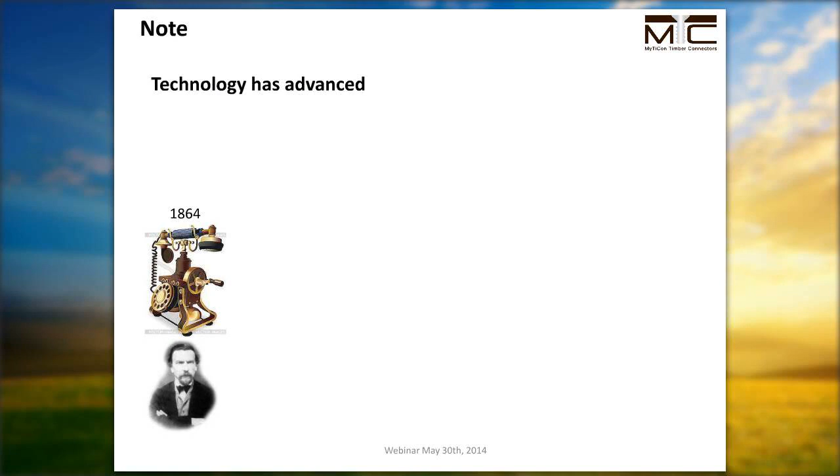First of all, we'd like to note that technology has advanced, not only in the phone industry, just like we see here in the first picture. The first phones were not easy to use - we had to generate electricity first, we had the dial pad, and it was not very convenient. Then later, when I was a little kid, I still remember we had these phones with the dial pad and the big handle that you had to pick up and dial. Today we all use smartphones with big displays, and we can actually view PDF files and structural drawings right on our phones. Technology has advanced not only in phone technology or cell phones and landlines, but also in timber connections.

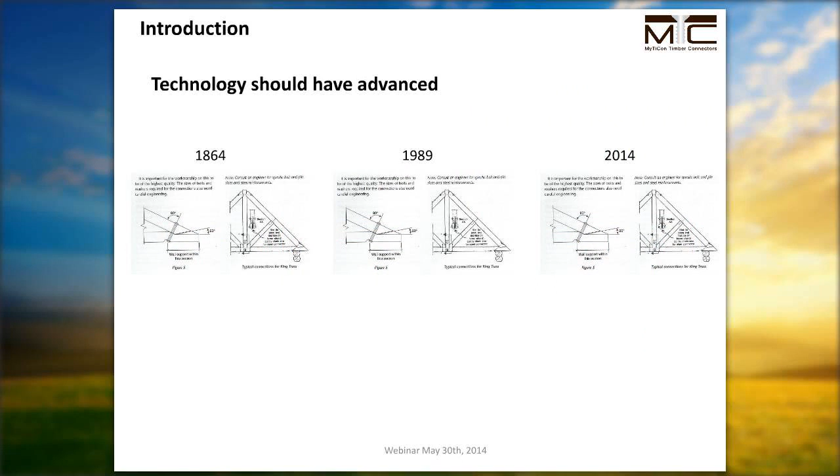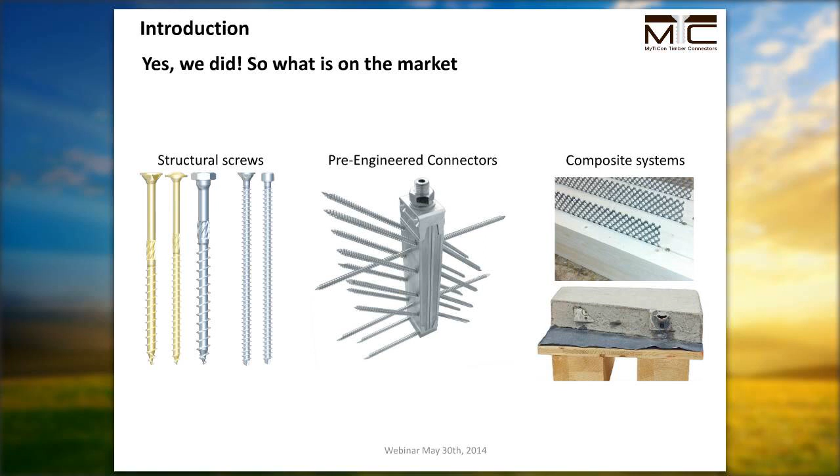Sometimes if we look at some of the structures and designs, we feel like there is no advancement, but there is certainly advancement in timber connection technologies. So yes, we did advance - in particular, we advanced in screw and glue technologies that we currently have on the market.

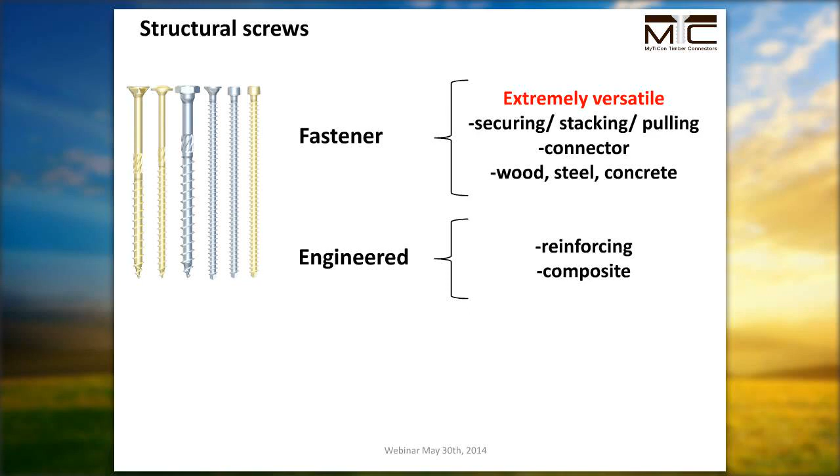In regards to structural wood screws, we can basically distinguish them into fasteners, where they are extremely versatile for securing, stacking timber pieces, pulling timber pieces together, and connecting wood to wood, steel to wood, and wood to concrete. If we look into more engineered applications, we can use structural wood screws as reinforcement, which we'll address later, and composite, which we'll also talk about later. So we can use these fasteners to reinforce our timber elements and create composite actions between different materials.

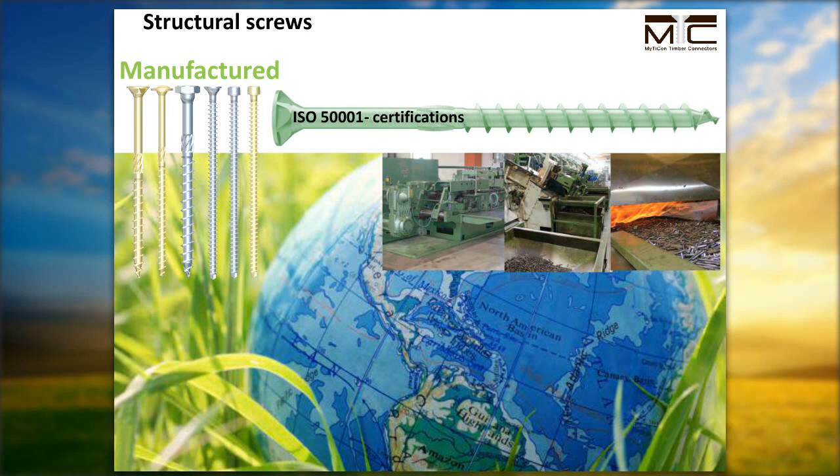From a sustainability point of view and LEED certification, it became very important that the manufacturing process of structural wood screws is ISO 50001 certified. This means most manufacturers have the ISO certification, meaning they use sustainable energy resources and have energy management systems in place to manage their energy use and be as efficient and as green as possible.

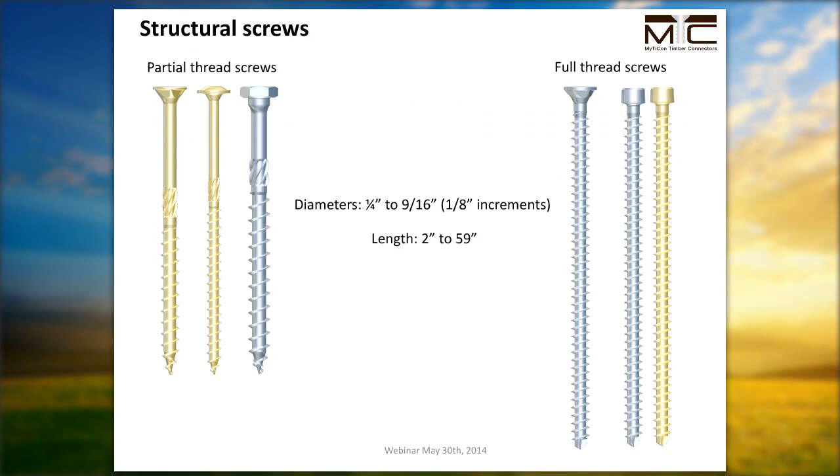For structural wood screws, we basically have two major groups. On the left-hand side we see the partially threaded screws, and on the right-hand side, the more engineered screws, the fully threaded screws. Diameters for these fasteners range from 1/4 inch to 9/16 inch and come in lengths from 2 inches all the way up to 59 inches.

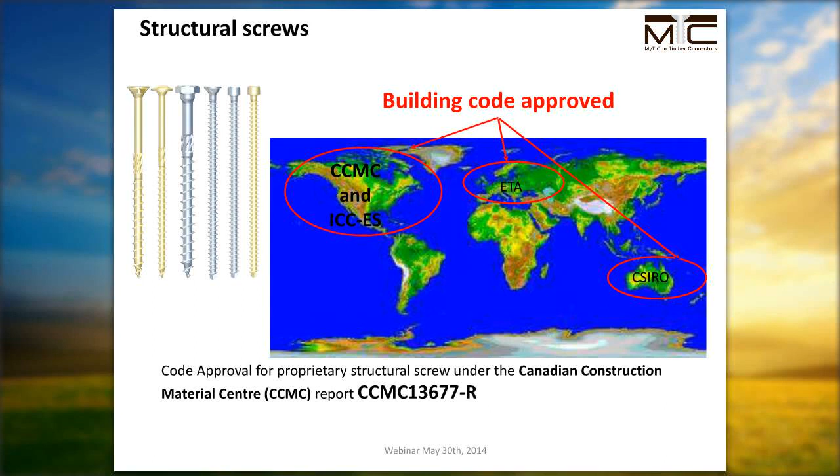In terms of code approvals, which is particularly important for engineers to have design procedures and design values in place, most of these fasteners are manufactured and developed in Europe, so they are all approved with an ETA, a European Technical Approval. Similar things apply to Australia, and in North America we are slowly getting into the approvals. There's one company on the market with a CCMC approval in Canada, and it also aims to have an ICC approval for the entire product range, including fully threaded wood screws.

So what is so special about structural wood screws? First of all, structural wood screws have an engineered tip, meaning they have a self-tapping or self-drilling tip. There are differences between tapping and drilling, which we won't address today, but just to make you aware, there are differences.

The self-tapping tip basically reduces the drive-in torque and pre-drills a hole with the proper diameter, which avoids a reduction in pull-out resistance that we would get if we have an oversized pre-drill hole.

The major brands all come in washer heads, hex heads, cylindrical heads, and countersunk heads. Each of those head shapes has its particular application in timber construction. The biggest element in terms of differences is probably the shaft.

With larger thread wings, we can create more bite into the wood and higher pull-out capacities. We also reduce the so-called wedge effect, the splitting of the wood. This means we can fit more fasteners into the same timber cross-section and potentially even reduce the cross-section, making it a more efficient timber connection system.

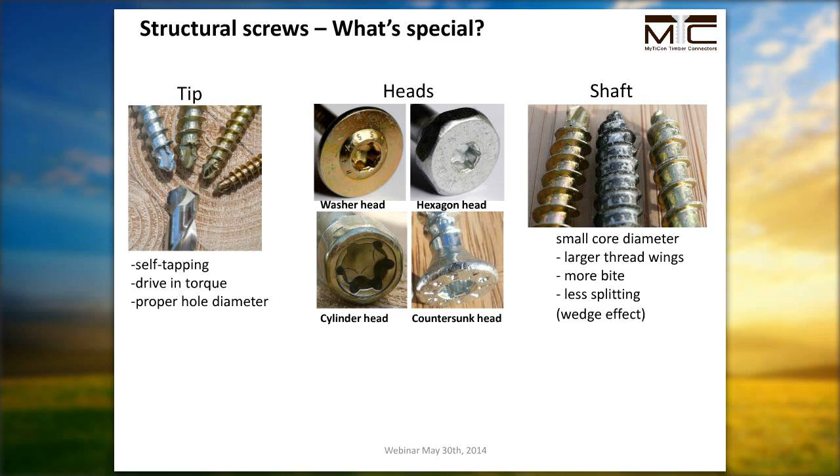If we look at the capacities or strengths of these screws and compare them to a standard lag screw, which we've probably all used in our designs, let's take a look at the 1/2-inch lag screw from the Canadian Engineering Design in Wood Standard CSA O86.

We will see a bending yield strength of 310 MPa. If we look into the CCMC approval for the 1/2-inch code-approved screw in Canada, we will see a bending yield strength of 1147 MPa. This will give us big capacity differences when the bending yield strength of the fastener controls the connection capacity.

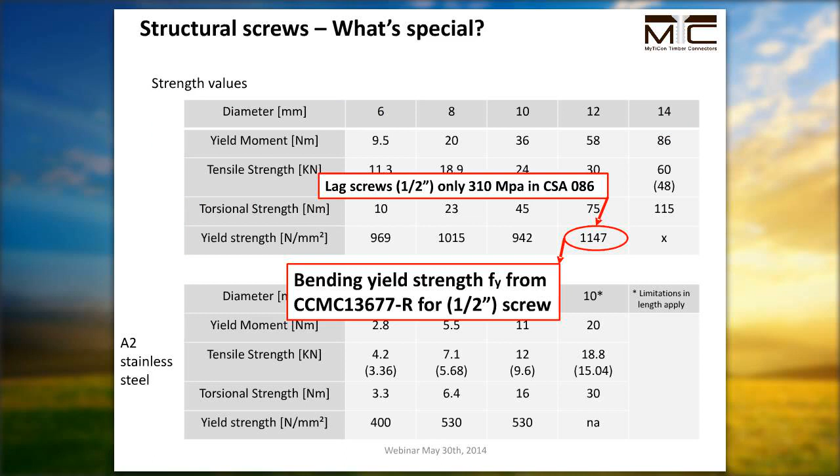So even with smaller core diameters and smaller shank diameters, we can actually get larger capacities if the bending yield strength controls our connection.

We also need to pay attention to spacings and edge distances, as these requirements for structural wood screws are different from those of lag bolts, DIN screws, or regular wood screws.

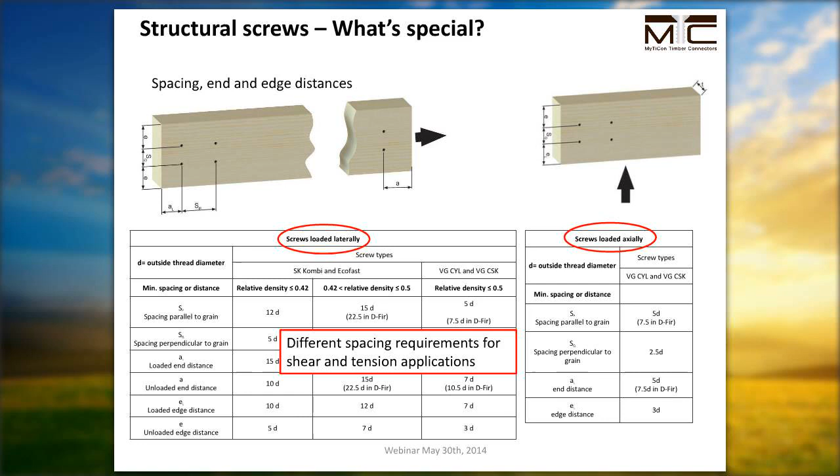Screws loaded laterally will basically follow certain spacing and edge distance requirements, while screws loaded in tension, where the force component is parallel to the screw axis, can use smaller spacings because there are less splitting forces in our connection systems.

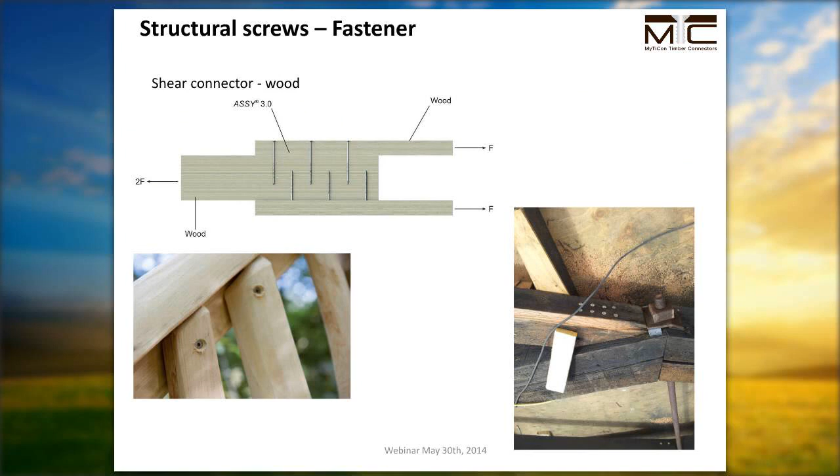If we think about shear connection systems, we can basically use structural wood screws, drive them in without pre-drilling, and create a regular shear connection where the force component is perpendicular to the screw axis. We can utilize the same concept for steel-to-wood connections, where we have a steel side plate and the timber main member, connecting the steel to the wood with structural wood screws.

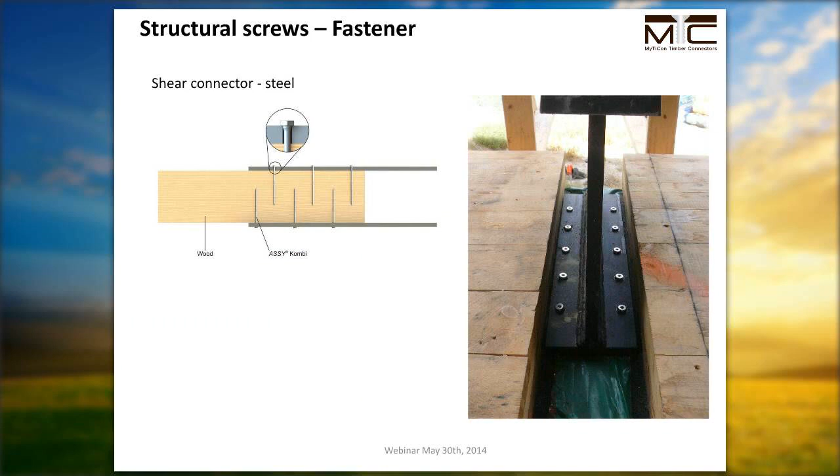If we now need higher connection capacities, we want to use the pull-out capacity of the fastener, because the pull-out or withdrawal resistance of a screw is much, much higher than its bending or shear capacity in timber.

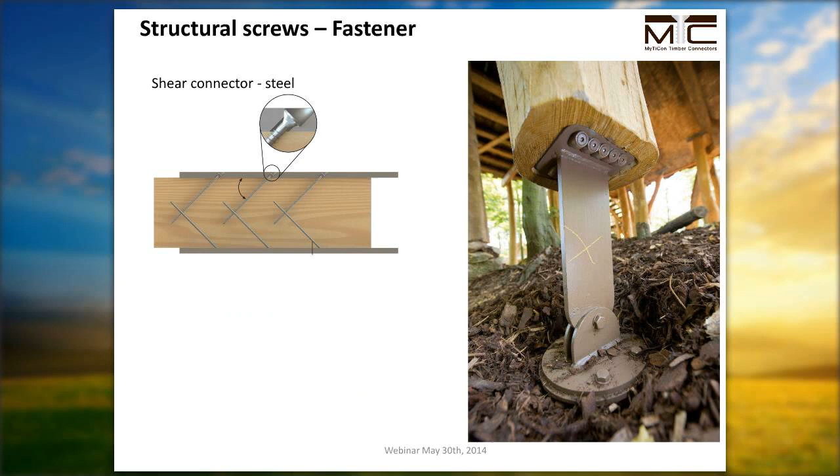So what happens if we basically turn the screw by 45 degrees and put it into a steel plate or a timber connection? We will get a tension connection, utilizing the withdrawal resistance of the fastener, and get higher connection capacities and stiffnesses.

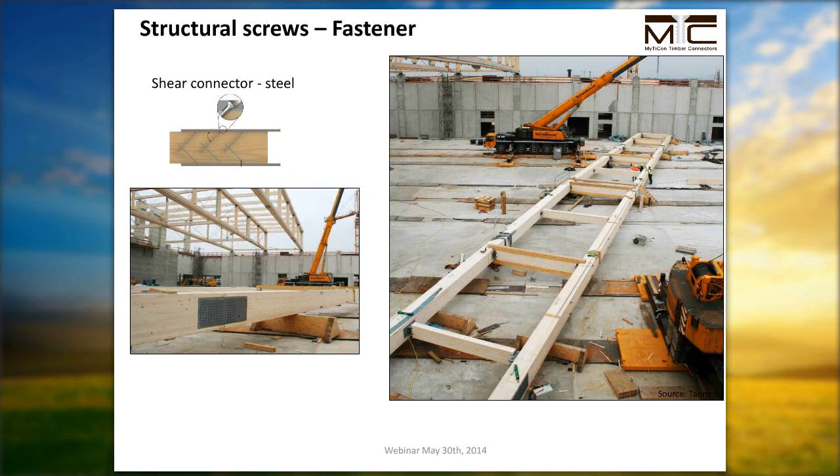As an example, we would like to show you one of the biggest projects here in Europe, where they have a timber truss with a large tension bottom chord splice joint. The splices were needed for transportation purposes, and as you can see, we have a very big steel plate with a lot of screws.

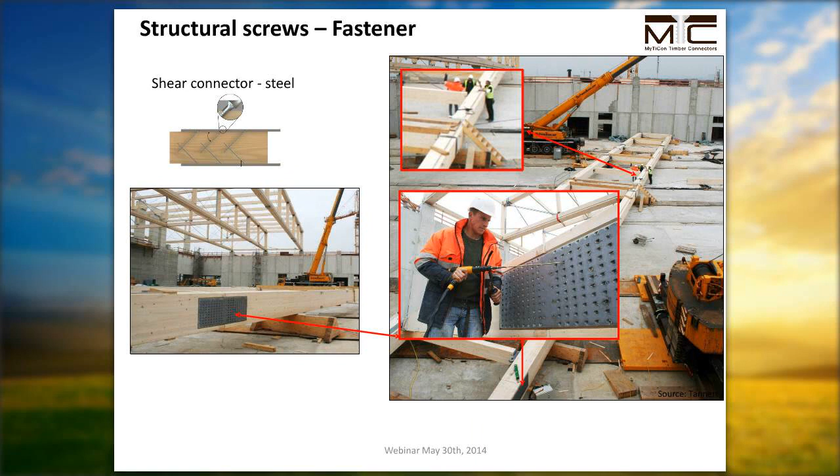3/8 by 39-inch long, fully threaded wood screws, actually driven in at 45-degree angles to connect the tension bottom chord splice joint in this truss. So a lot of these fasteners in a connection can make it a very, very strong connection.

Thinking about the most recent topic of CLT systems, cross-laminated timber has become a major topic in North America. Since the major structural connector in CLT are wood screws, we really need to think about how do we design this and how do we connect this.

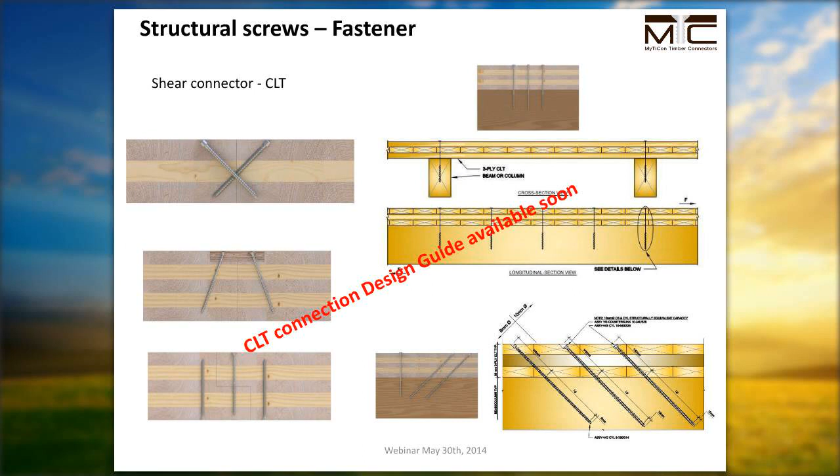Shortly, there will be a design guide available, following values and design procedures outlined in Canadian code approvals, free for you within the next 4 weeks. For today, we want to look at some testing that we have conducted in order to develop the design guide on CLT butt joints.

Test data is available for the surface spline joints from fall 2014, and also for half-lap joints. We will do some research and verify our assumptions in our design guide.

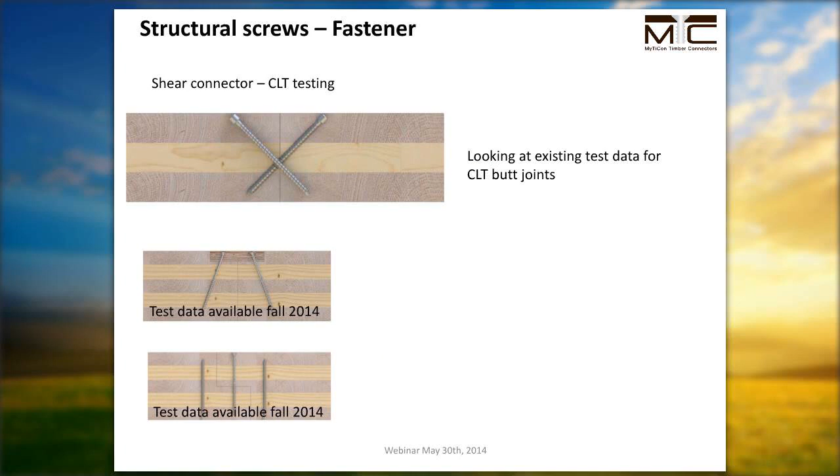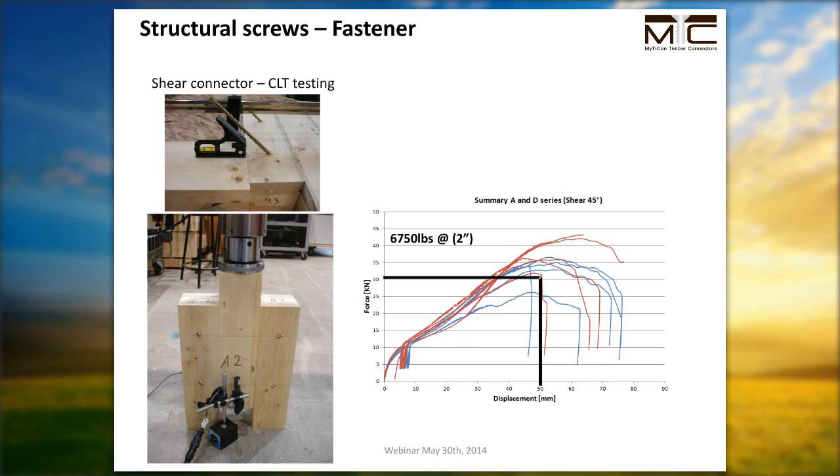If we look at existing data for the butt joints, we basically have two connection configurations. The first is the screw driven in on a 45-degree angle to the panel plane, which has a plain shear action of the system. We get around 6,700 pounds at 2 inches of displacement for this connection type.

So what happens if we put the screw into a double inclined angle now and utilize its tension capacity? For this connection type, we get 10,000 pounds capacity and only 3/4 inch of displacement. This basically indicates that by turning the screw to a 45-degree angle and utilizing its tension capacity, we get much higher capacities and less displacement.

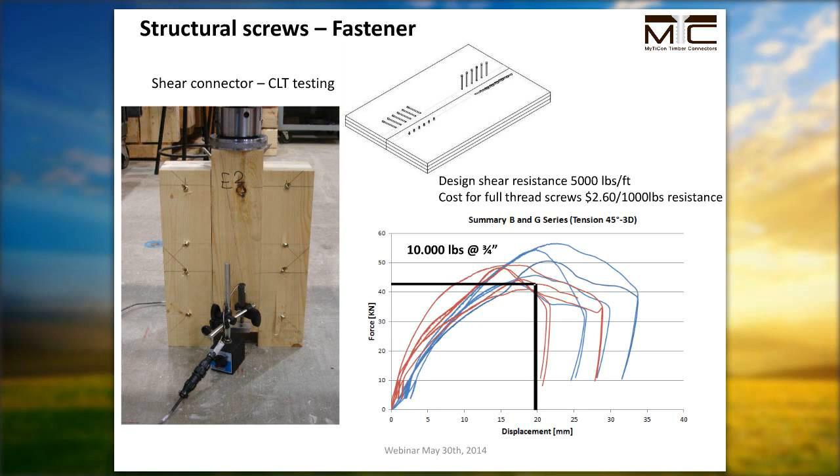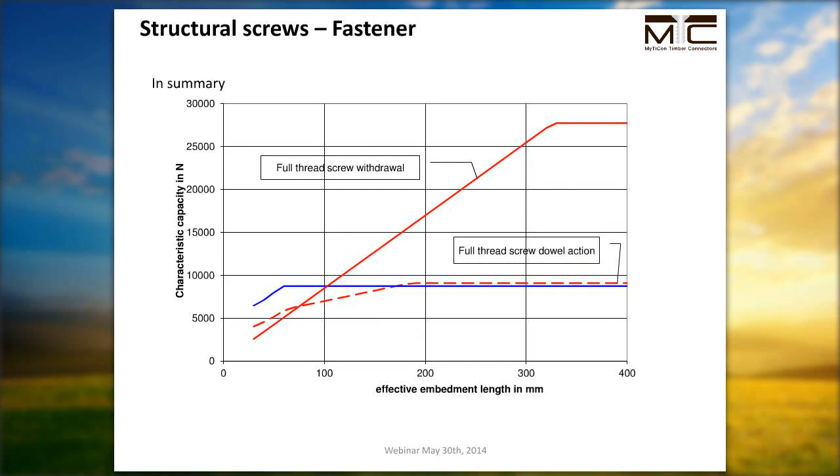So what we basically do here is buy capacity and pay for it with ductility. We can see the curves are not as ductile, or the entire connection performance is not as ductile as in a plain shear connection. This is something we have to watch out for if we design with structural wood screws in tension. This shows us the general difference: on the bottom, we see the dowel action of fasteners, which is very flat but very ductile, and the inclined line is the performance of a fastener in withdrawal or tension.

Money rules the world, so we always need to consider cost efficiencies, particularly in larger structures. Here we look at a regular 5,000 pound shear connection. On the left-hand side, we designed this connection with regular lag screws, 8 of them, 1/2 inch by 10 inch. Cost will be around $18, and we need around 15 minutes to assemble this connection, including the pre-drilling.

If we were to use structural wood screws on this, we can use two 1/2 inch by 12 inch fully threaded screws with one assembly screw. The screw cost would be around $16, and the time required to assemble it is around the 6-minute mark. So we can utilize this connection system to make our fasteners more efficient in bigger structures.

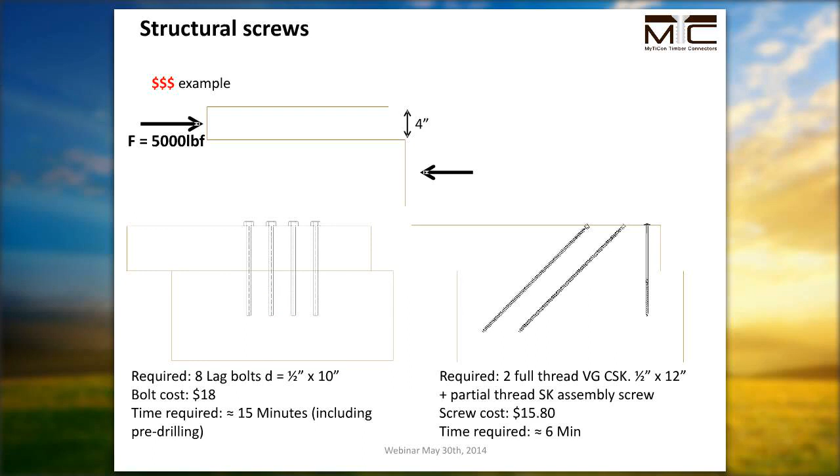Of course, if we only have 2 connections in a residential home, the time saving doesn't really matter. But if we have 1,000 connections in a commercial timber structure, a time saving of 9 minutes can reduce our cost significantly.

Getting into more engineered applications, we talk about reinforcing timber. Wood has inherent weaknesses in perpendicular to grain crushing, perpendicular to grain tension or splitting, and parallel to grain shear failure. Concrete has similar weaknesses in tension.

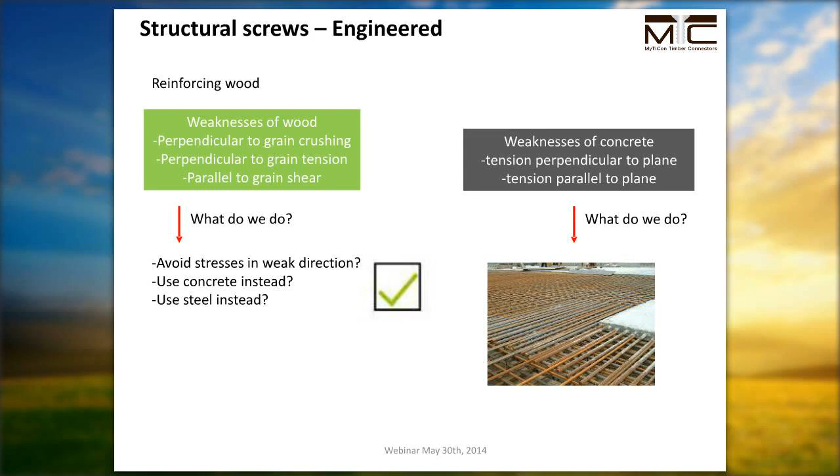What we do in concrete is put a whole lot of rebar in it to reinforce its weakness in tension. What do we typically do in wood? Well, in wood we have no real reinforcement technologies embedded in the code, so we typically try to avoid stresses in weak directions, or use concrete and steel instead.

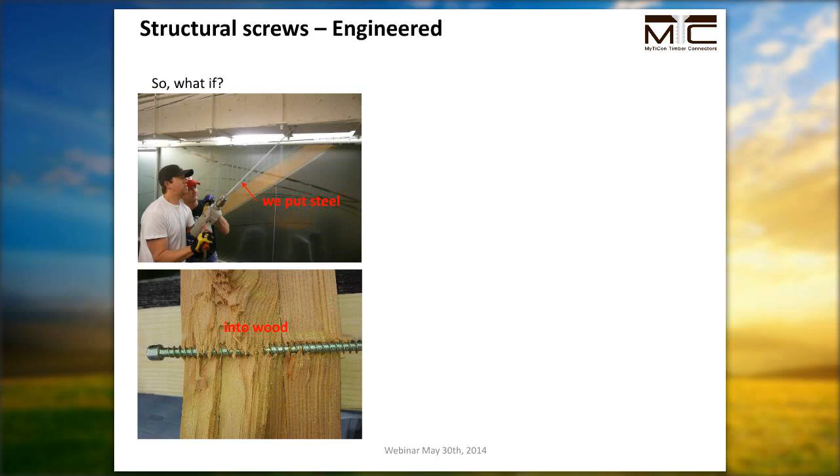So what we are thinking is, what happens if we put a piece of steel, speaking of a structural wood screw, that is embedded into our timber element, like shown in the bottom picture? Would that not be the general same idea for reinforcing timber? And yes, projects locally here in Vancouver show that this is a valid technology.

So engineers have used this concept of basically bridging stress concentrations at the origin of cracks. If we have deep checks or cracks in our timber elements, we get stress concentrations at the origin of the cracks, and we would basically have to reduce our cross-section to a smaller one.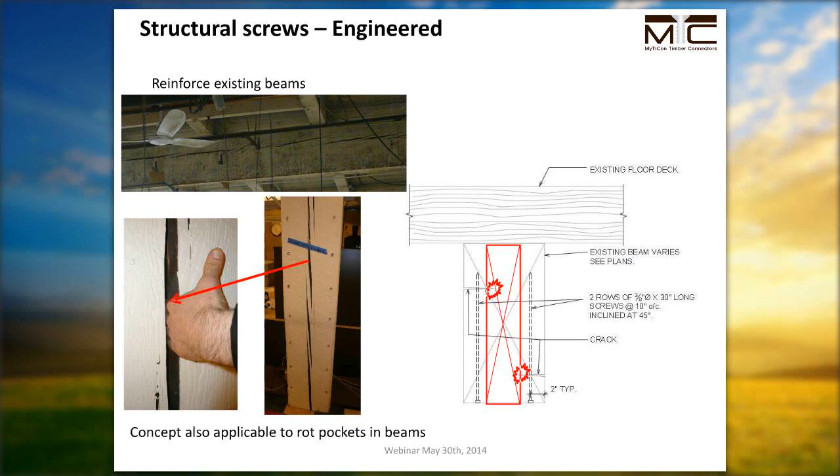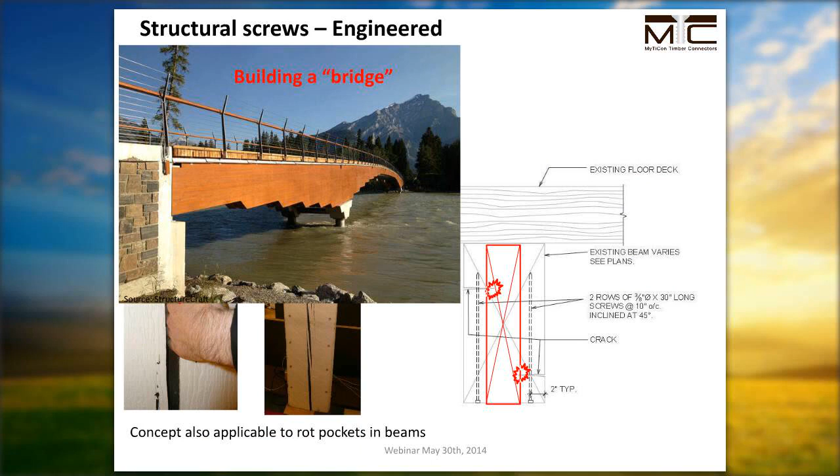So what happens if we drive a structural wood screw through those checks and basically build a bridge for the stress to travel across the crack? This would allow us to re-establish the old cross-section and have a very efficient timber reinforcement.

This project here was in downtown Vancouver just about 2 years ago, I believe. It's a 4-story post and beam timber structure, heritage protected, and the beams needed reinforcements. So we used 3/8 by 30 inch fully threaded wood screws driven in on 45-degree angles to reinforce the deep checks and cracks in the timber elements and post elements.

The outcomes and findings for this were cost savings. It's a fast, clean, and quiet construction technology because all you need is a drill, screws, an extension cord, and maybe a ladder to reach the beams up on the ceiling. Also, we were able to preserve the beautiful old growth timbers in the structure and kept the heritage status without changing the visual appearance.

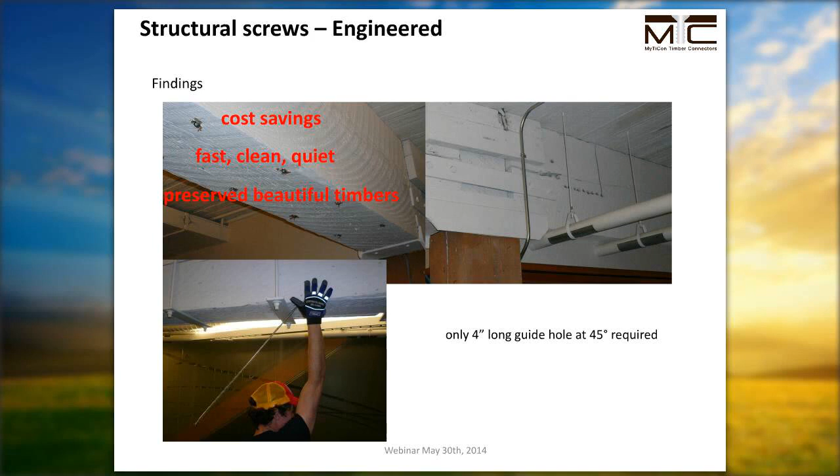Also important to mention is that the building was kept fully occupied. There's a big software company located in this building with lots of computers, and they really needed to keep their employees working during this construction period. So what we did, we came in at 6 p.m. at night and worked till 6 a.m. in the morning, just driving in wood screws all night long.

Another efficient reinforcement technology is to reinforce regular notches in order to avoid cross-section reductions, or reinforce perpendicular to grain if we hang something onto a beam and encounter perpendicular to grain stresses. Design methods for this are available. Most of the Canadian or US distributors will have technical support available for you, and they are happy to forward you the design procedure and help you with the design of the system.

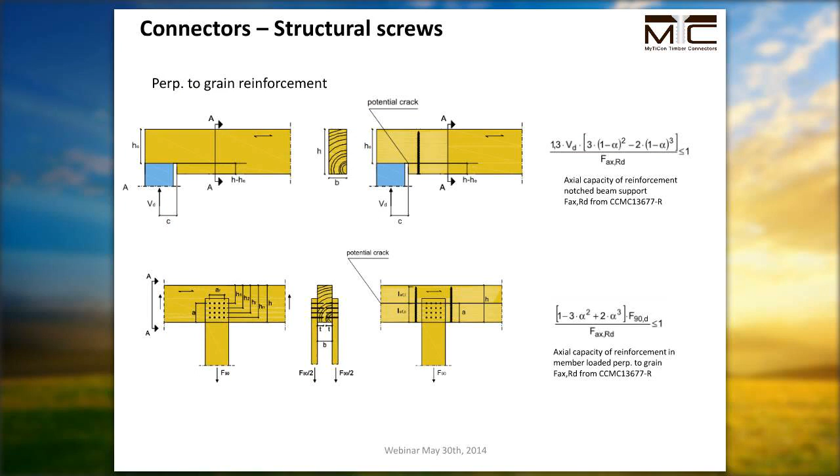Compression reinforcement is also a new concept where fully threaded wood screws can be used. How this basically works is you drive the wood screw into the timber element. The wood screw acts as a stiff element, attracts the loads, and transfers them along its axis to the tip. The loads are released back into the timber, and because of the stress propagation in timber, we can now utilize the value shown here with LEF2 as our bearing area.

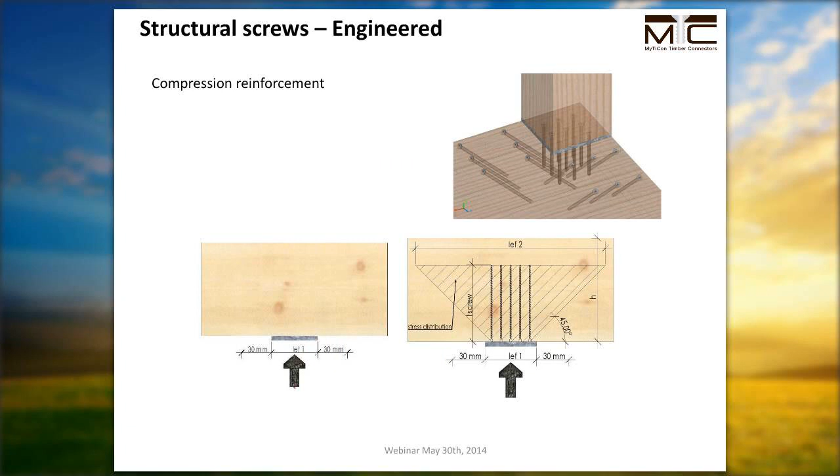In regard to stiffness and flexure reinforcement, this is also a question that frequently comes our way. There are a few different options. You can, if you want to use timber elements, screw a 5/16 inch steel plate or a 1/4 inch steel plate, depending on the values you need, onto the bottom of the beam, using the steel plate in the tension zone with screws in tension to increase the flexure stiffness and capacity. With a 5/16 steel plate, we can go up to an 80% ultimate load increase and a stiffness increase of around 50%.

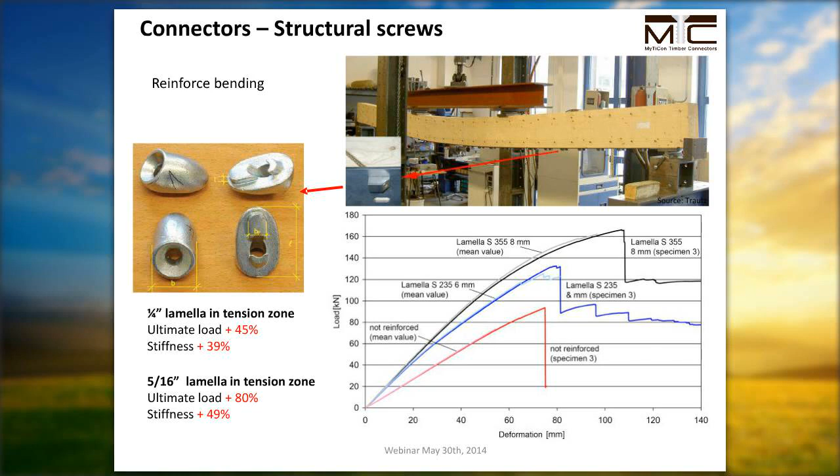So if we have an existing beam that is over-deflecting or overloaded, this is certainly a very efficient technology to reinforce timber elements. The same applies if we basically bolt on another timber element onto an existing timber beam.

This is from a local project here in Vancouver, a school building. The beams were deflecting too much and needed reinforcement. In some areas, timber elements were screwed onto the bottom of the beam into the tension zone, and in some areas we reinforced the upper element of the beam in the compression zone to increase the cross section. Fully threaded screws were again used to establish the connection between the new element and the old element without removing the existing beams.

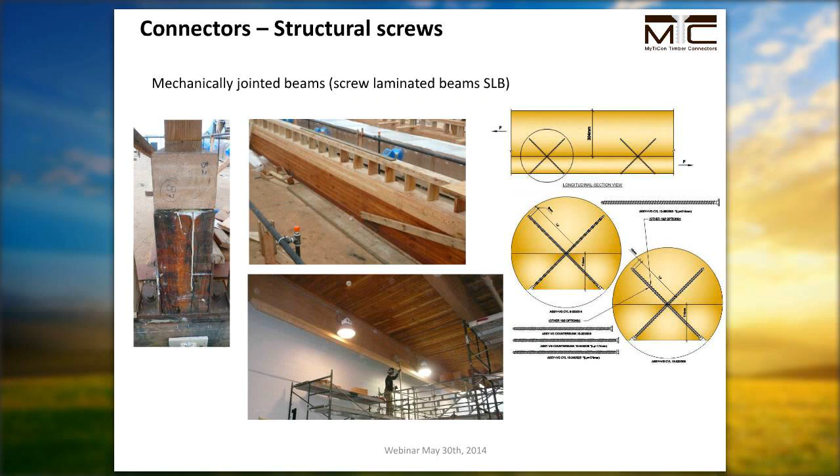This is it so far for structural wood screws. Now we will go into the pre-engineered connection systems. For these systems, one particular problem is that there's a large variety on the market and they are not necessarily code approved. So in order to use these systems according to codes, in Canada we can go into the CSA O86 and utilize clause 3.3.2, and in the NDS we can use clause 1.1.1.4. These clauses basically tell us that North American timber design standards permit the use of new connection systems if reliable test data or analysis based on recognized theory is provided.

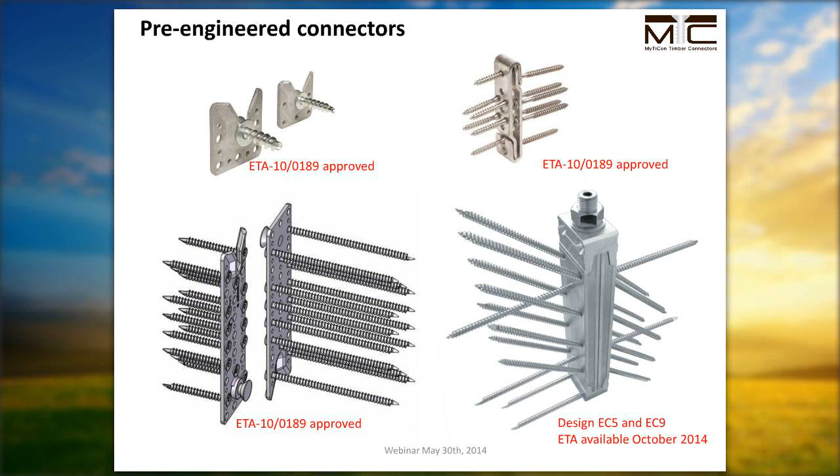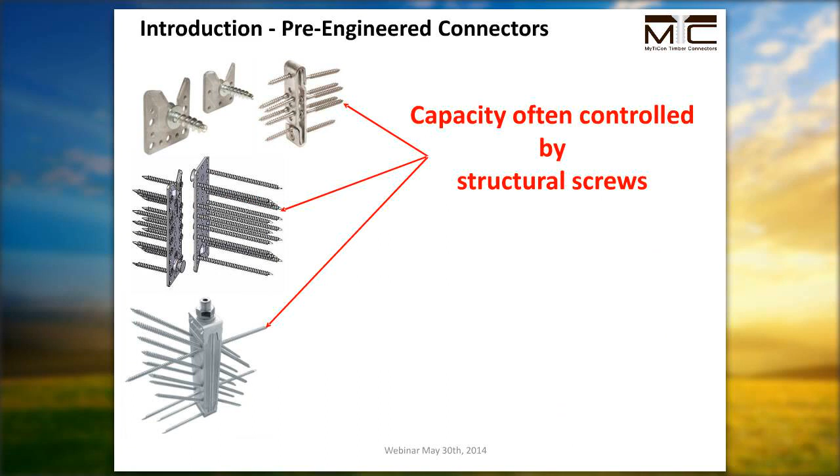How we would approach this with European connection systems, for instance, is that most of these systems are ETA approved. This is a European technical approval, similar to a CCMC or ICC approval in the US, where you can find the approval numbers from your technical support or hardware supplier. These approvals show you design methods, and you probably also get easy access to test data where you can verify your design based on real test data. Most of these systems again use a lot of structural wood screws, as their capacity is often controlled by structural wood screws. So structural wood screws also play a major role in pre-engineered connection systems.

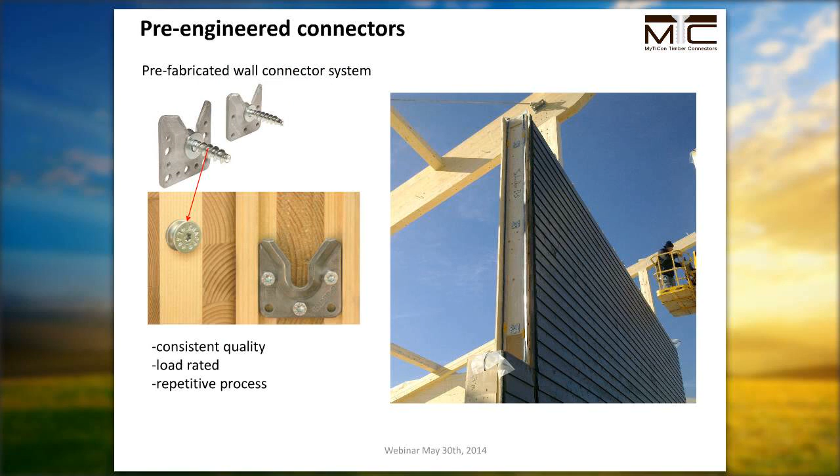All of the manufacturers have small systems for pre-manufactured walls, stairs, and rather furniture-type connectors, or for CLT panels. Larger systems have two different basic approaches. One system is where screws are driven in straight into the grain, end grain or side grain. End grain always receives longer screws, side grain receives shorter screws, and the screw is used in its pure shear action. Capacities range up to somewhere around 10,000 pounds, maybe even up to 100 kilonewtons, depending on where you use it and which timber species you use. On the right-hand side, we see a different approach with aluminum plates.

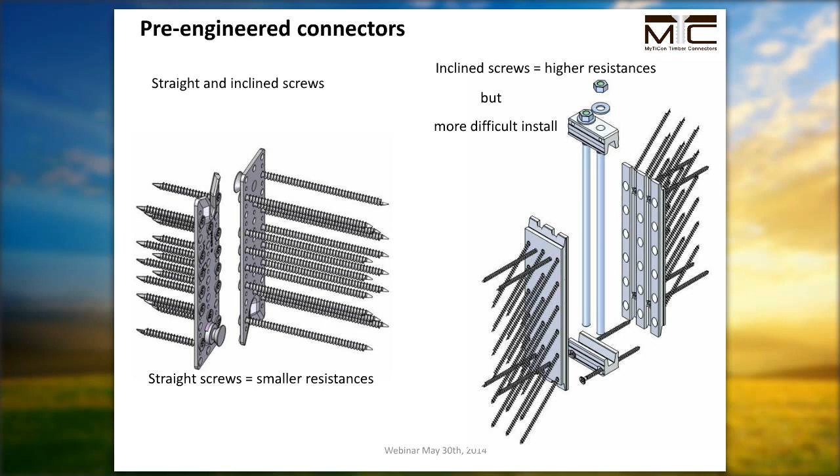There are several manufacturers on the market with dovetail shapes, without dovetail shapes, V shapes, notches, and whatnot. So you will have to find the system that you like best and think is best for site assembly. The aluminum systems mostly use screws on an inclined angle of 45 degrees to again utilize the fastener's pull-out capacities.

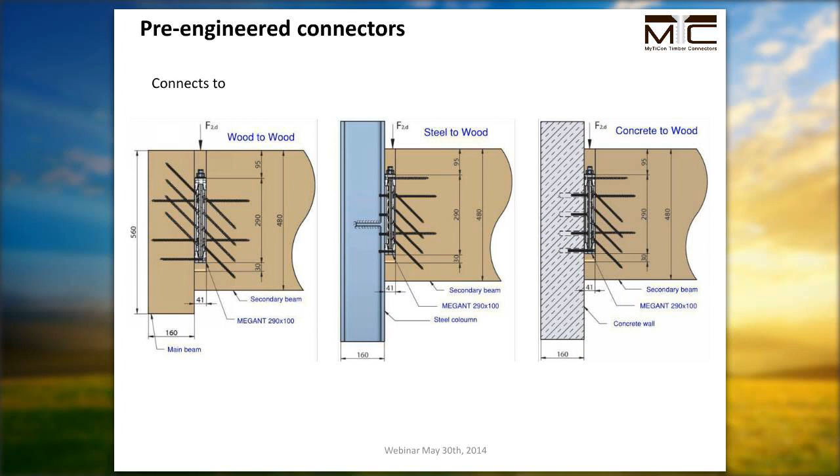A big advantage of the pre-engineered systems is that we can connect wood to wood elements, wood to steel elements, and wood to concrete elements using the same system. So the assembly and quality control procedure will always be the same, and we can standardize our process and make it more efficient. Here we have a short example of how these systems are used.

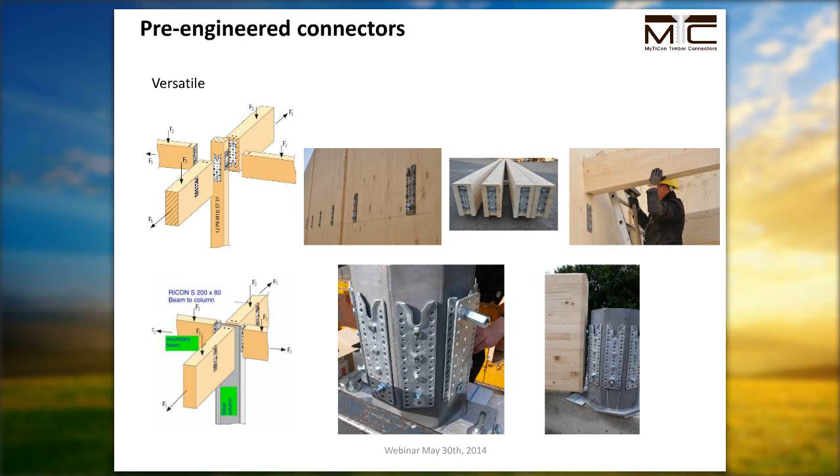If we were to use it in a steel to wood connection, we would basically use structural wood screws in the timber element and a 3/8, 5/16, or 1/2 inch bolt, depending on our load requirements, into the steel post. And then we can again use the same procedure to connect our elements into place.

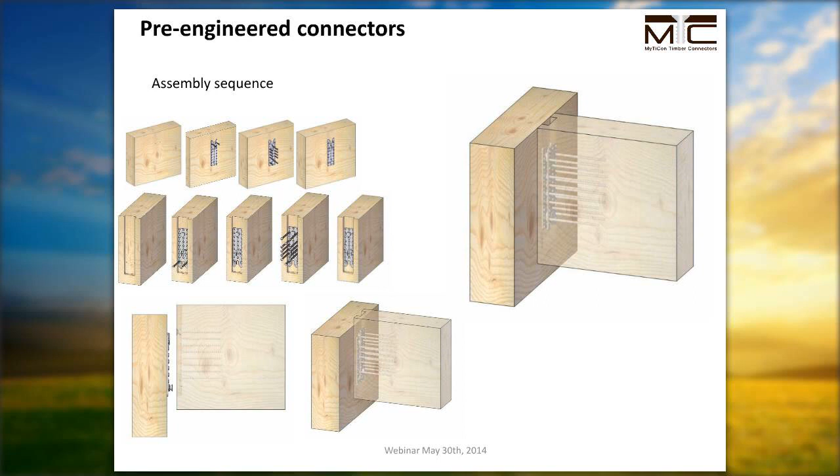As we can see here, most of these systems can be applied with all 3 sides concealed or even 4 sides concealed, depending on the intent you have. These systems can also, of course, be visible, but most people like to have the fasteners fully concealed.

In terms of tolerance requirements, we get a lot of questions and concerns from people about how this works on site. For this particular system, we have about 1/8 of an inch tolerance for the beam assembly. This means if you have one connector on each side, that gives you 1/16 of an inch tolerance on each side of the beam. The tolerance requirements should be okay and are practical, considering the short way of engagement needed to slide the connector into place.

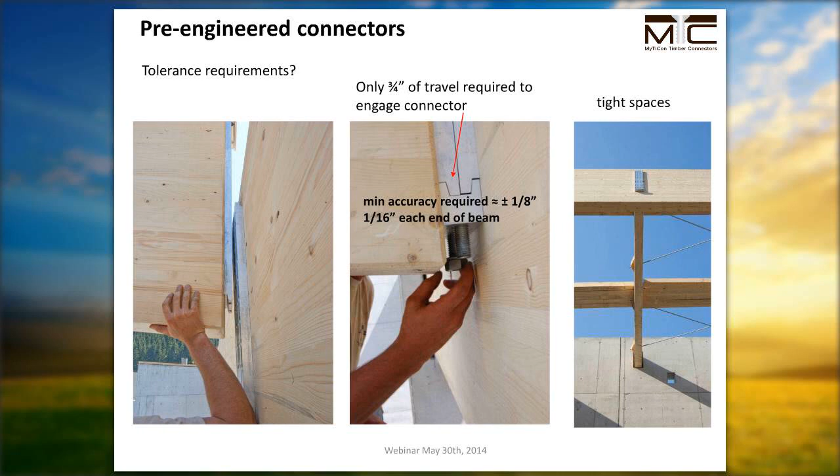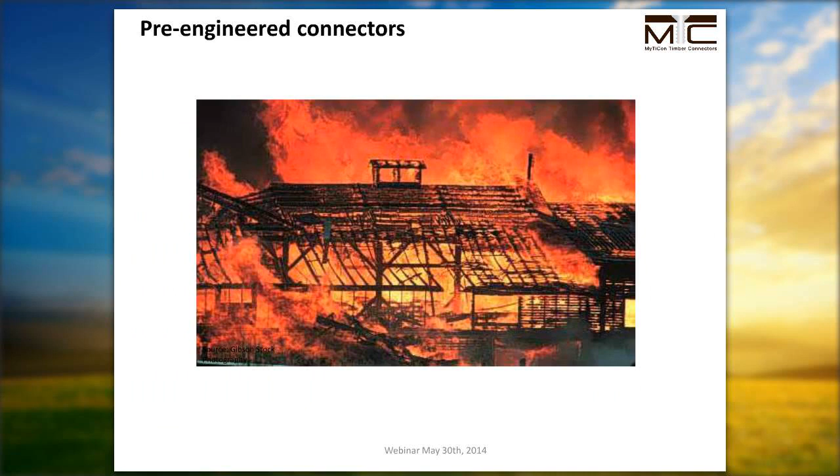Fire. If we want to use timber in commercial timber construction, which certainly is one of the goals many engineers and architects have, we need to think about fire protection and how we do this in our timber systems. For the pre-engineered connection systems, it's actually fairly simple.

We can use the charring rate of wood to calculate our fire ratings, as long as we conceal the connector from at least 3 or 4 sides. And if we make sure the connectors are tightly assembled, that means we cannot allow more than a 1 millimeter gap between the main member and the side member.

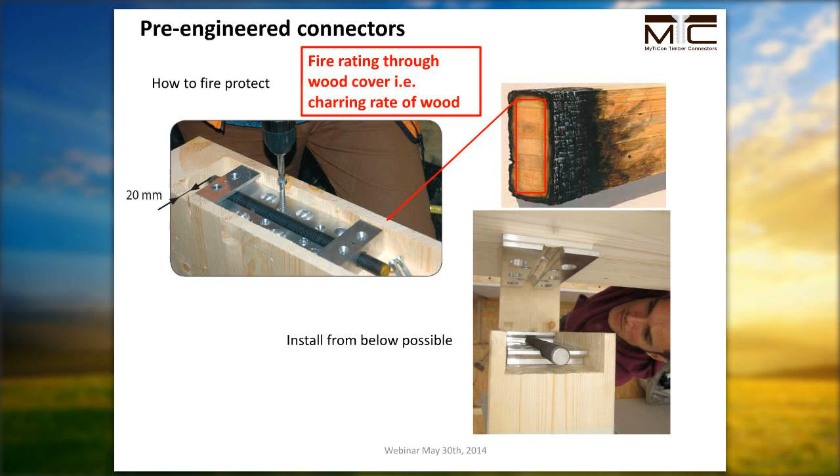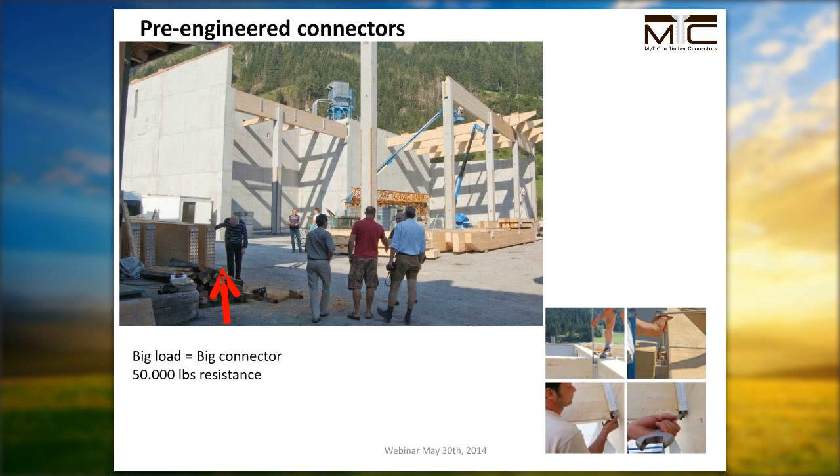Here we see one of the biggest connections done so far with this pre-engineered system. We have around 50,000 pounds resistance, and we can see above the red arrow how big these systems get. So a big load will always require a big connector.

For the last part on systems, we go into the composite actions of wood to concrete systems. We'll just give you a quick introduction here, and if there's interest in one of these topics for a later webinar this summer, we can address design procedures of these systems and probably also give you insight on recent testing going on here in British Columbia.

If we talk about wood to concrete composite systems, we always have to consider implementing water into our building, because concrete will be pumped in. So if we have a large amount of wood in our timber structure, we might run into concerns that the timber soaks up a lot of water. We have to do on-site formwork, and we may need to be concerned with temperatures in winter, particularly here in Canada, where it gets very cold and concrete pouring can become a problem. There are several systems on the market that address these issues in different ways.

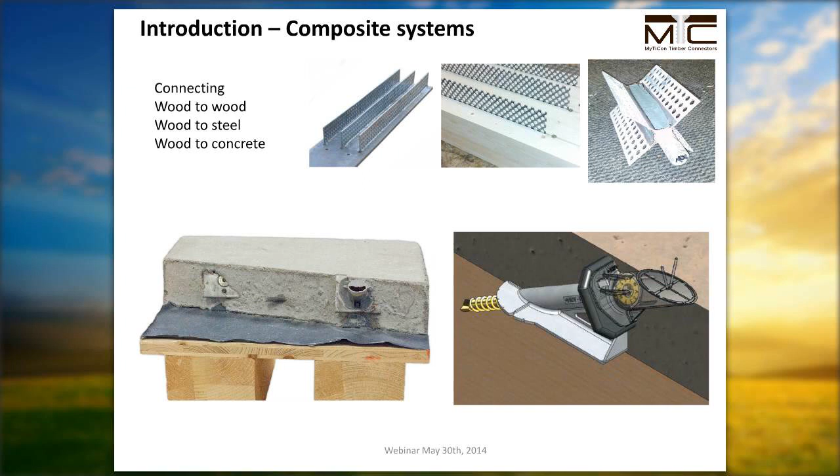One is the epoxied-in metal mesh, which can create wood to wood connections, steel to wood connections, or wood to concrete connections. Another is the pre-manufactured FT system, which works with structural wood screws, generating a pre-manufactured element.

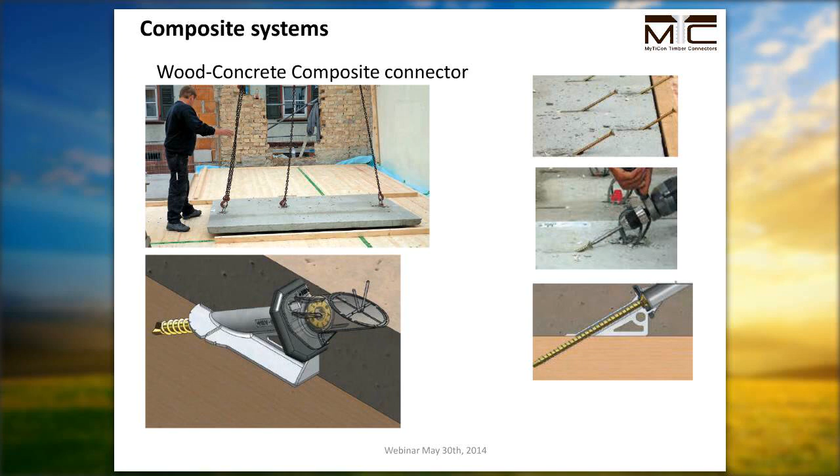So what we see here is the shear connector embedded into our concrete element off-site. The concrete elements are pre-manufactured in the concrete plant and cured there. While this is happening, we erect the first story of our timber structure. Once this is done, we drop all the elements in place, pop in the little lid with the structural wood screw, and drive the screw through the pipe down into the wood. Once all the wood screws are driven in, we've created full composite action of our system without having to set up any formwork on site, and without being dependent on site temperatures. This can certainly increase construction speed and keep construction going during the winter time if need be.

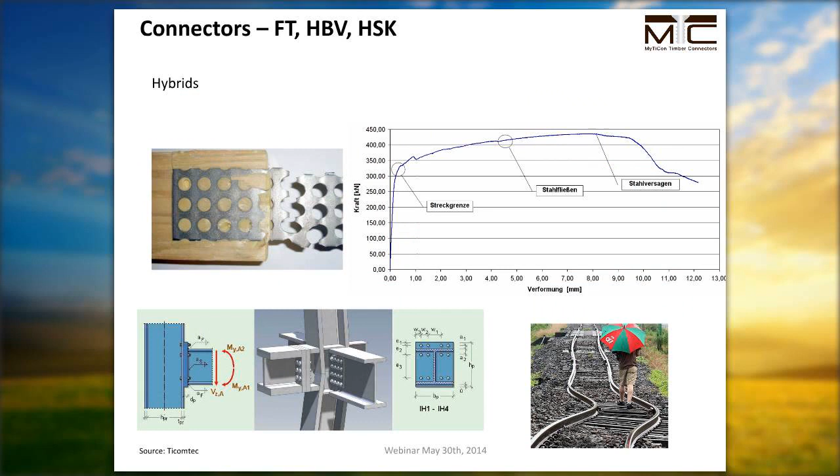The HBV HSK system, with the epoxied-in metal mesh, is also a European system, very well researched and also available in North America. The biggest advantage of the system is its outstanding performance in terms of stiffness and ductility. It is basically a mild steel plate that is epoxied into our timber element, and concrete is poured over it. The mild steel gives us a very ductile performance while maintaining a very high initial stiffness.

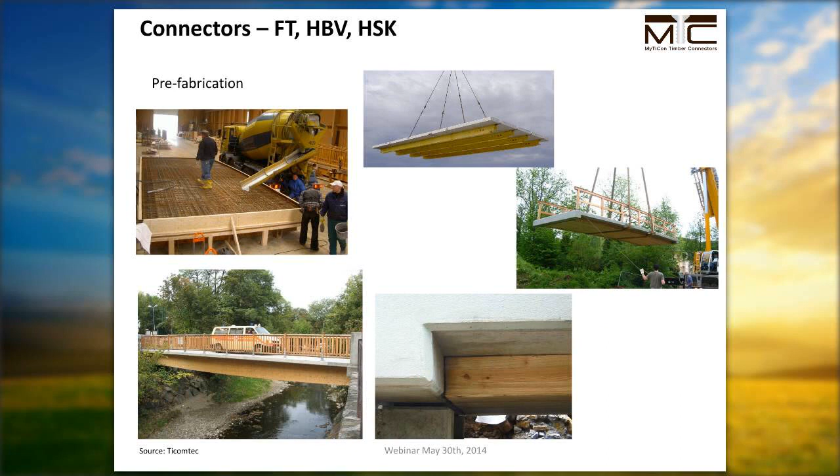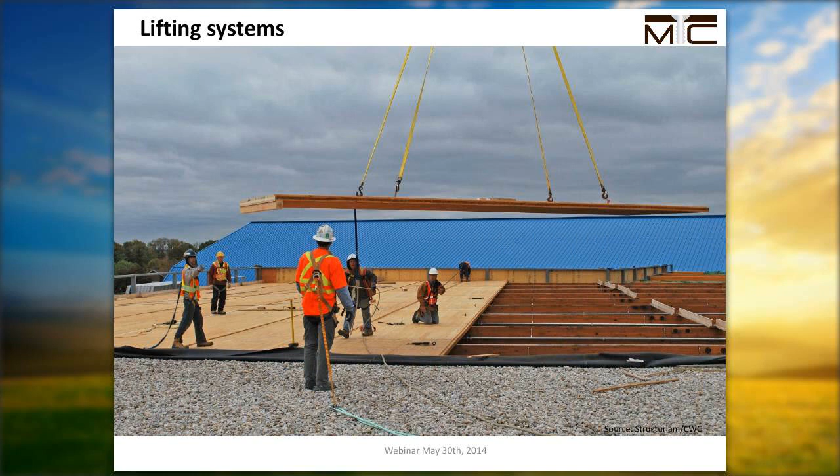Talking about pre-manufactured elements and lifting of these elements, we often run into problems: how do we lift these panels now? For CLT lifting, for instance, there are a few systems already on the market that are used.

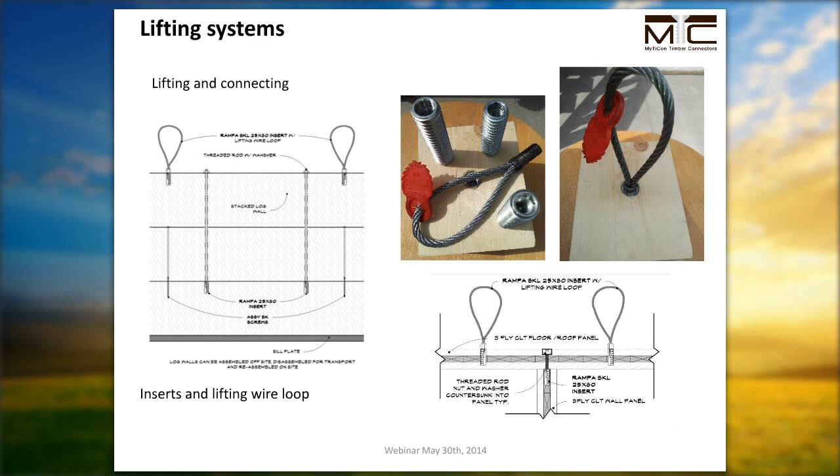One system is the inserts. Inserts are pre-drilled and inserted into the CLT element, and a lifting anchor, a threaded wire lifting loop as we call it, is threaded into the insert and lifted up. This is a very simple and easy to use system. Loads, or lifting capacities, with four lifting points and spreader bars are somewhere around 5,000 to 7,000 pounds, depending on the lifting conditions.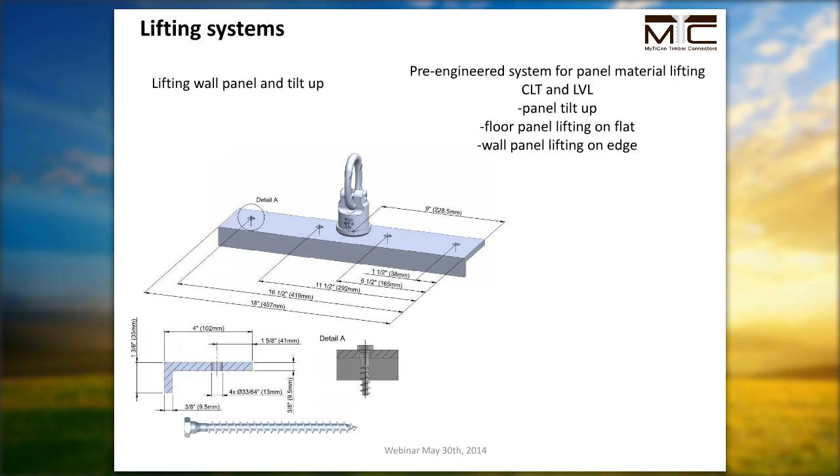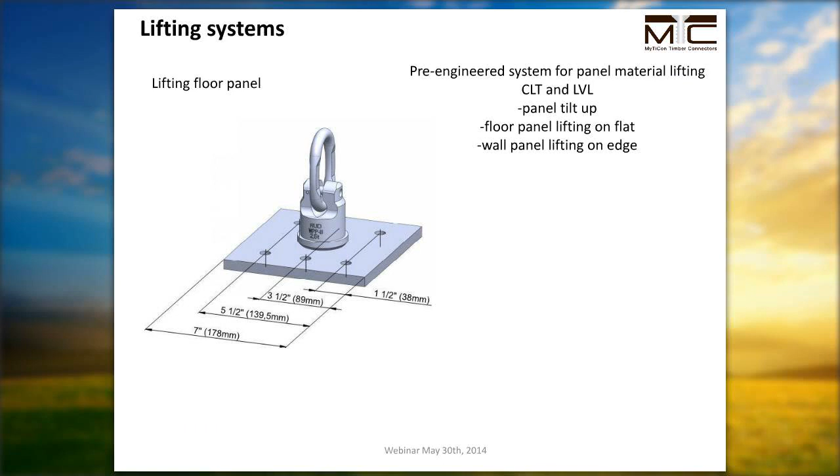Another system we are currently developing is a steel plate system, again with structural wood screws, to lift wall panels from the flatbed truck onto the construction site in one lift. We will also address lifting of steel plates for lifting wall panels, CLT or LVL panels, maybe even nail-laminated panels, which appear more and more in the market. A design guide and lifting procedure for this will be available in the next six weeks, giving us a safe lifting procedure developed for CLT or pre-manufactured element handling.

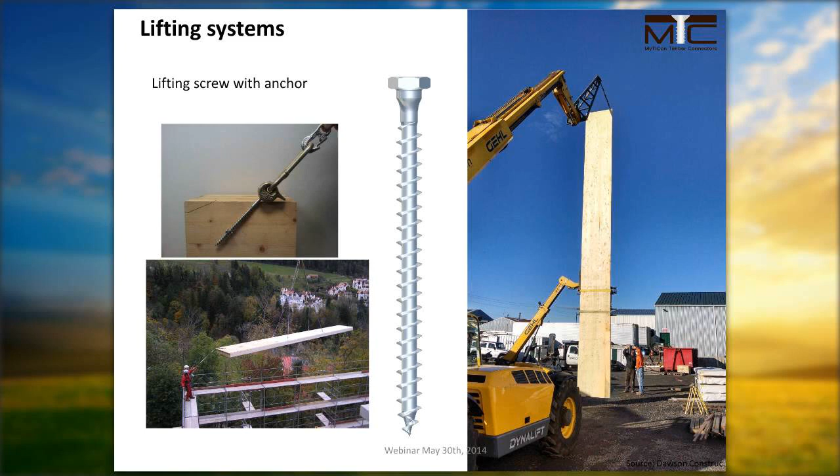A lighter duty lifting device would be the transport anchor. Again, this system works with a structural wood screw, half inch diameter, six and a quarter inches long, with a full thread. The full thread gives us a lot of pull-out capacity, and the system can lift up to 1,000 to 1,500 pounds per lifting point, depending on the timber species and the lifting conditions we are in. We can use it for lifting with helicopters, as we see in the lower left picture, or we can lift it with a regular crane. It always depends on where and how you want to use the system, but it is certainly a very cost-effective and efficient way of lifting timber elements.

In regards to accessories for steel plate to wood connections, there are several systems available from each manufacturer.

On the top, we see a so-called 90-degree cup washer. These cup washers basically eliminate the countersunk pre-drilled hole in the steel plate and reduce manufacturing cost of the steel plates, as it is fairly expensive to ream out the hole with the proper diameter to receive the screw head properly. So these washers basically substitute the reaming out of the hole and reduce steel plate manufacturing.

In the lower picture, we see a new technology with 45-degree wedge washers. This system will give you the advantage of using the pull-out capacity of the screw if you require high capacities and stiffnesses. This system is available with 5/16 washers for 5/16 screws, 3/8 and 1/2 inch fasteners here in Canada and the United States.

Again, this 45-degree washer system is intended to reduce the steel plate manufacturing cost. Most of the cost savings come from the reduced thickness of the steel plate and also the cost that occurs with the manufacturing of the hole. So the 45-degree washers only need a punched hole or a milled hole rather than a hole milled by a 5-axis CNC machine. So again, we only intend to reduce steel manufacturing costs here and get the fastener in tension rather than in shear.

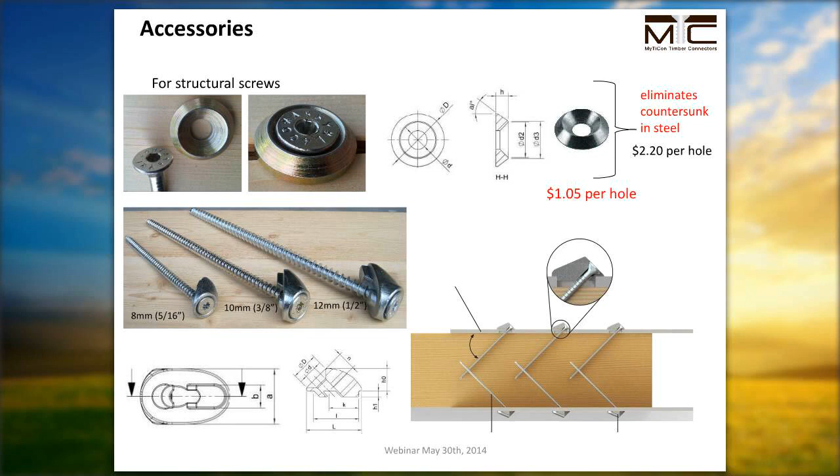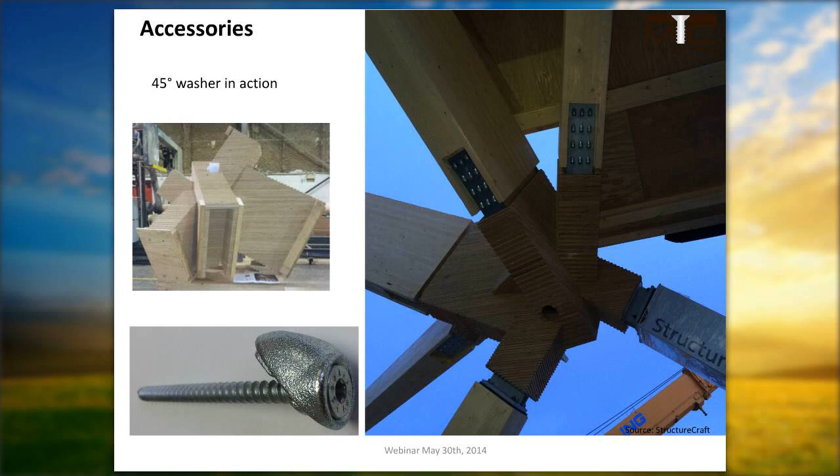Here we have an example from a local company that used these washers recently in a bigger project, where we can see the washers being used in a tension connection node in a steel plate and wood. So what we can say in conclusion is that there's big advancements in screw and glue technology.

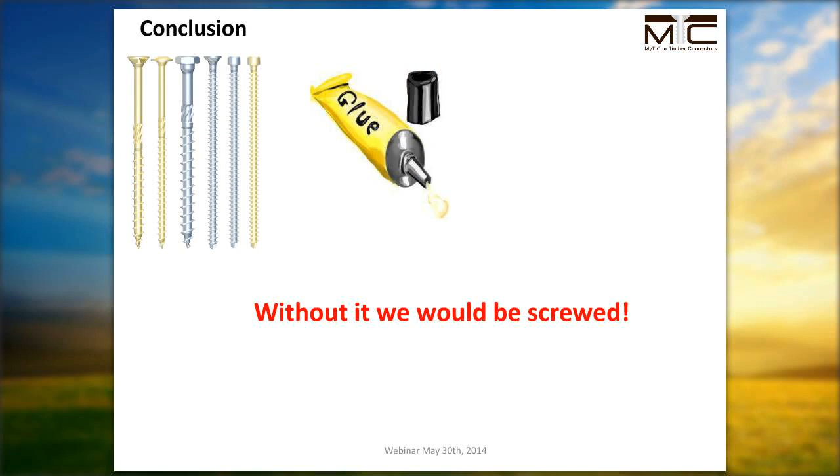Glue technology mainly for the wood to concrete composite, HSK and HBV systems. Screw technology for all the other systems that we showed you, and without screws and glue we would basically be screwed, because we would not be able to build all these beautiful and big challenging timber structures.

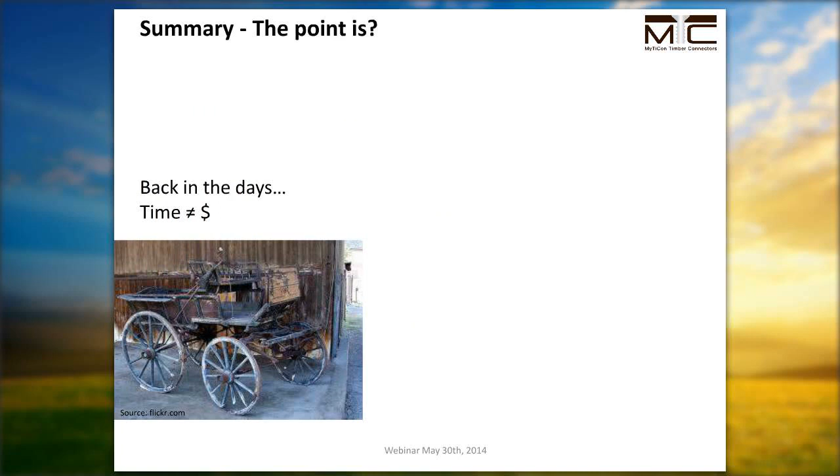In summary, we can basically say that back in the days we were riding the carriage because we didn't have anything else and time didn't really matter. However, today we are all in a rush and time matters. So we would rather prefer to drive a Ferrari against the carriage.

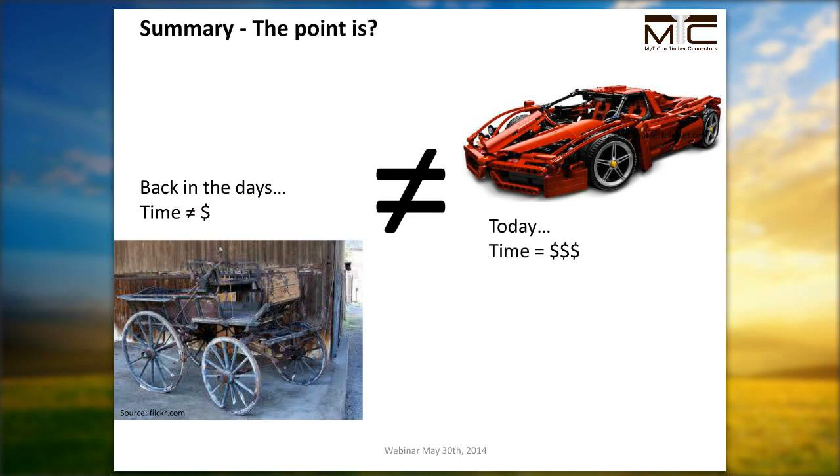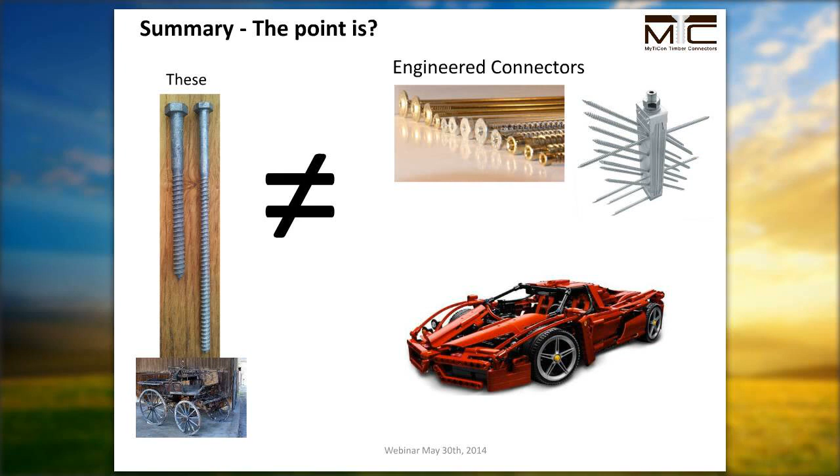A good example to compare this is the old-fashioned lag screws, where you have to pre-drill a long hole, and the quality is not controlled in a very good manner, probably rather comparable to the old carriage. The modern timber connection systems can certainly help us to increase construction speed and make timber connections and timber construction more efficient and more competitive with steel and concrete if need be.

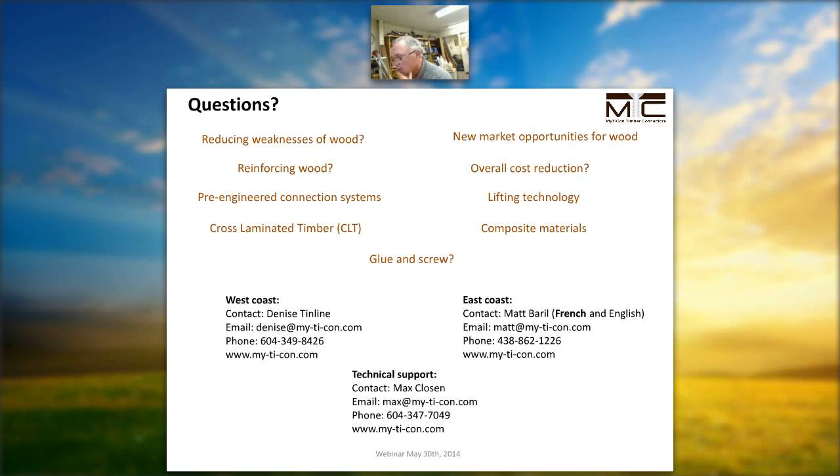45-degree slope washers are available for the half-inch screw. We do carry some of these in stock here in Vancouver. We are just looking into the first projects where these are used. There may also be two US projects that use the half-inch washers in big timber structures.

Jing from Vancouver is asking about the availability of 90-degree washers. These are available for the 6mm, 8mm, and 10mm screws. We did already have some requests for the half-inch screws, and we will certainly work on that and have this available hopefully by the end of the year too.

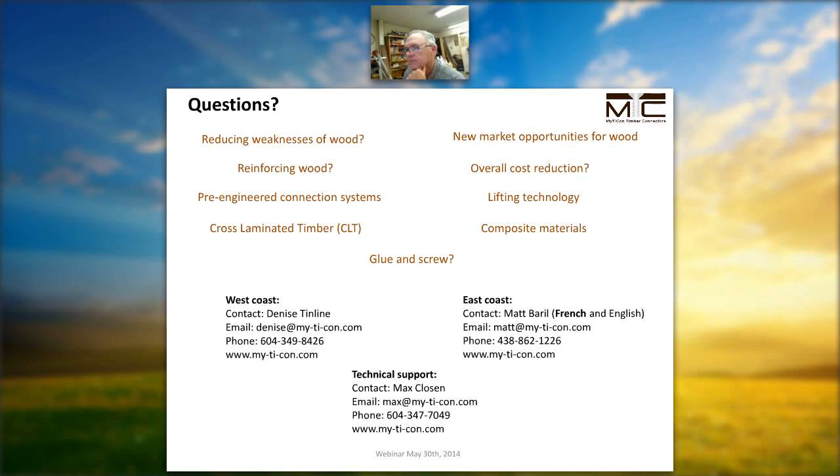In regards to sourcing some of the products for different brands, there are distributors across North America, in particular East Coast of Canada, West Coast of the United States. Your local technical support or local salespeople will be happy to point you in the right direction. For our particular products, we ship throughout the entire West Coast from our Vancouver warehouse within 4 to 5 business days usually. So if you order from us in the morning before 11 a.m., we will ship it out the same day. To Seattle, to address this particular question, it would usually take 2 business days to get there.

Yes, we will make the slides available in a PDF format. I think it is probably available already. I would have to confirm this with Matt, but yes, the slides are going to be available for download.

Our design guide will be published probably with a newsletter that you may want to sign up for, or maybe you are signed up for it already as a follow-up for this webinar. As soon as we have it ready and shop drawings are reviewed for all the design guides, we basically publish that with the newsletter.

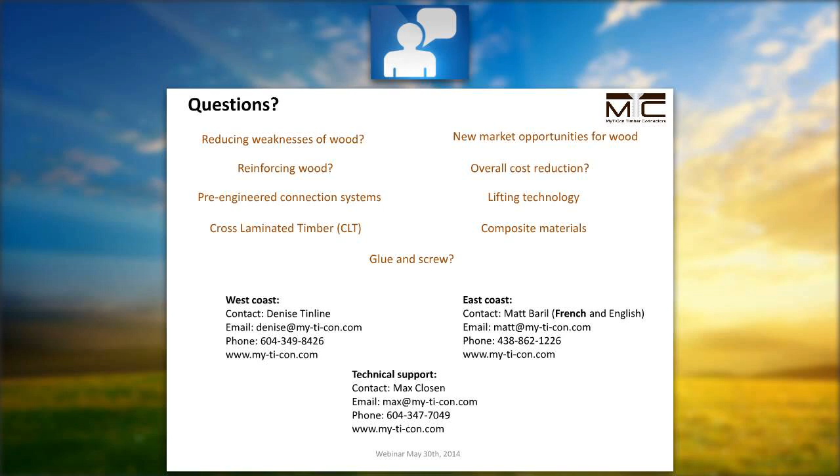Here's an interesting question from Brian Doyle, thank you for asking this. I actually forgot to address this in the webinar. A very important question is whether we can use fully threaded wood screws in wet wood or green wood - this is certainly not something we can do. Fully threaded wood screws are basically a piece of rebar embedded in the wood, and if the wood tries to shrink or swell, we introduce restrained shrinkage or swelling stresses that can actually tear the fastener apart in tension. Wood is very strong when it shrinks or swells and develops enormous internal forces that can damage the fastener or even produce stress release checks or cracks in other areas of the timber element. So fully threaded wood screws can only be used up to a moisture content of 18 or lower.

So we need kiln dried wood to use fully threaded wood screws efficiently without encountering problems. Partially threaded wood screws, however, can be used just like lag bolts in any type of wood, including green wood, as long as we make sure that in a two-member connection the threads are only embedded in one of the members, so that the wood can basically slide freely along the shank, up and down, or move.

I see many questions about replay and slides. Just to make sure this is clear, yes, this will be available for replay. We will send you an email with the link, and in that email you will find the slides for this presentation as well. So you will have access to everything.